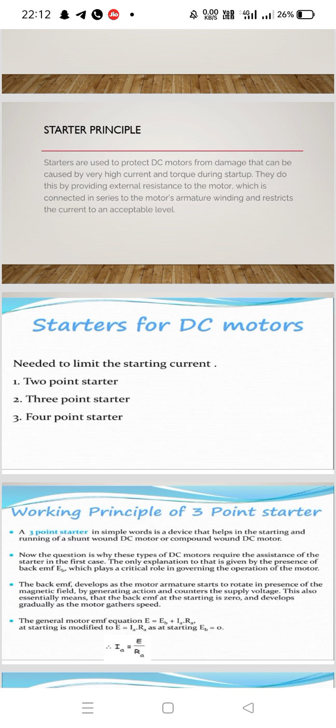At starting, the armature resistance has a very low value and the speed is also very low. Speed is 0 at starting. Ia equals (V minus Eb) by Ra. As speed is 0, Ia equals directly V by Ra. The V value is about 230 volts and the Ra value is about 0.5 ohms. 230 by 0.5 means about 460 amperes.

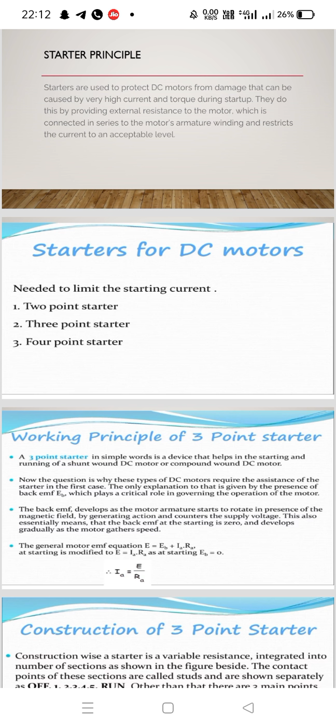If 460 amperes, nearly 20 times greater than full load current, directly passes through the motor winding, the motor winding will be damaged. So to prevent this, we add some external resistance in series with the line. That adding of external resistance in series with the line is done by a special equipment known as a starter.

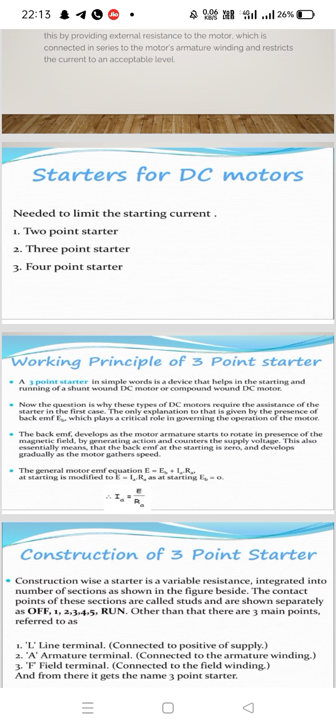Now coming to the 3-point starter, it has 3 points: line, field and armature. Here the overload release coil is connected in series with the line, and the no volt release coil is connected in series with the field.

At starting, when the supply is given, the whole of the resistance is connected in series with the load so that the starting current is very low. As soon as the current picks up, the speed also picks up. Hence, it works properly. The brass arc is connected to terminal F, the no volt release coil.

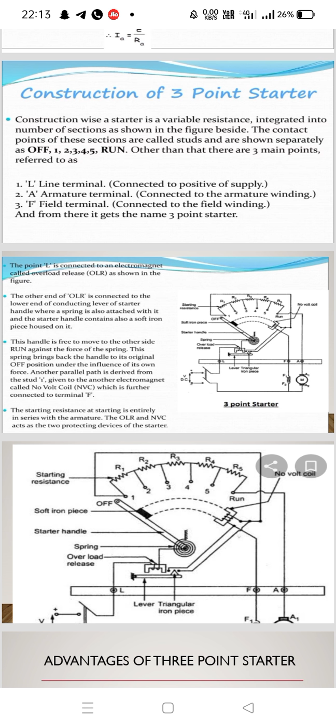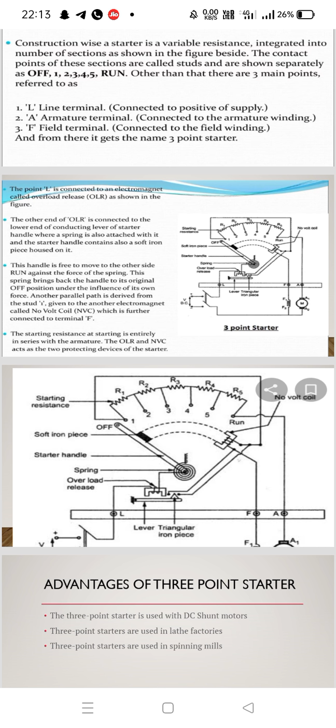Working. When the motor is at rest, the handle is in off position due to the action of a strong spring. To start the motor, the main switch is closed first and then the handle is slowly moved to the right. As soon as it comes in contact with the first stud, the whole of the starting resistance is inserted in series with the armature. At the same time, the field winding is directly connected across the supply through the brass arc, simultaneously holding

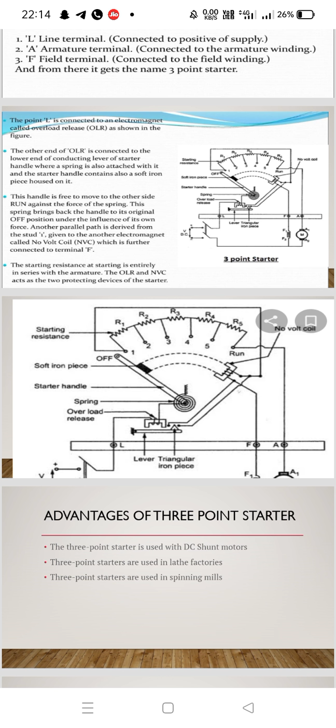coil energized. The handle moves through various studs against the spiral spring and finally the entire starting resistance is cut out from the armature circuit. When the handle reaches the on position, the soft iron piece attached to the handle is attracted and held by the holding or no volt release coil.

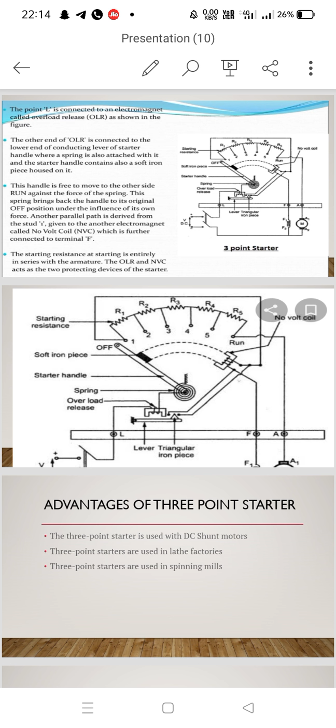Now some special points about the no volt release coil. The no volt release coil consists of an electromagnet connected in series with the shunt field which holds the iron piece in the on position. Whenever the supply fails or is disconnected, the electromagnet de-energizes and releases the handle. The handle goes to off position due to spring action and the motor is disconnected from the supply.

If the handle doesn't go back, when the supply gets restored, the armature of the motor is directly connected across the supply. So due to low armature resistance, heavy current flows through the armature winding and causes damage to the motor armature winding. In this way, the no volt release coil works.

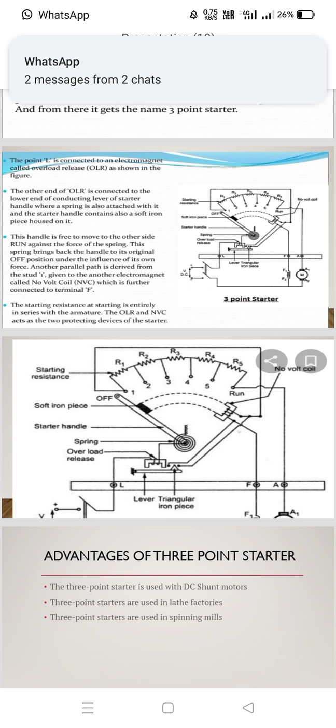So the no volt release coil demagnetizes and releases the handle. The handle goes back to off position and the motor is disconnected from the supply. In this way, the overload release coil protects the motor against overloads.

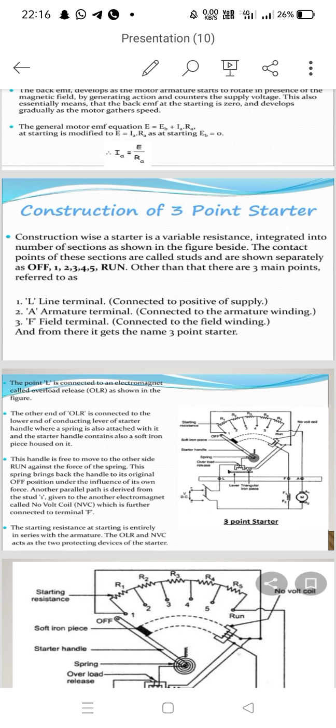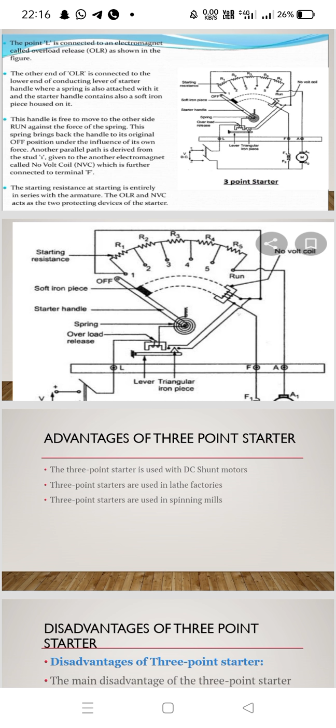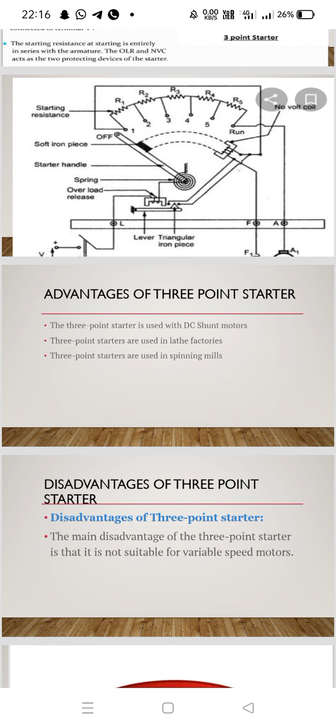Disadvantages. The main drawback of the 3-point starter is it is not used for speeds above normal speed. Advantages. The 3-point starter is used with DC shunt motors. 3-point starters are used in lathe factories. 3-point starters are used in spinning mills. Disadvantages of the 3-point starter: the main disadvantage is it is not suitable for variable speed motors.